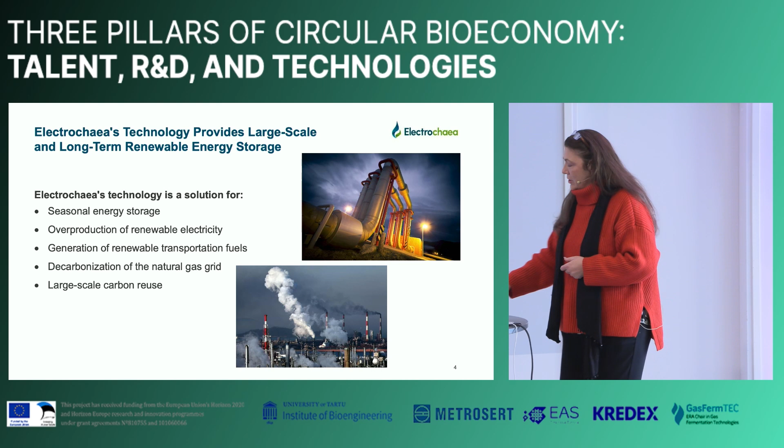It's also fine. Okay. So I will also target the question of renewable energy within my talk. And before I start, I would like to give a general overview. I will talk about energy and energy storage, especially from renewable energy. I will talk about the overproduction of renewable energy, the generation of renewable transportation fuels, decarbonization of gas grids, and also the large-scale carbon reuse, which is the link to the current session of carbon usage in biotechnology.

So let's have a look. Let's start with the whole value chain. On the left side, we are using electricity, renewable electricity preferably, for generating hydrogen. And we are also using carbon dioxide as the only carbon source. So I'm not talking about organic carbon sources, but the inorganic carbon source, carbon dioxide. And with the proprietary technology of Electrochaea, with the biocatalyst, we are creating methane in our reactor. This renewable methane is produced from renewable sources, from CO2 and hydrogen. This power-to-gas technology is the core here.

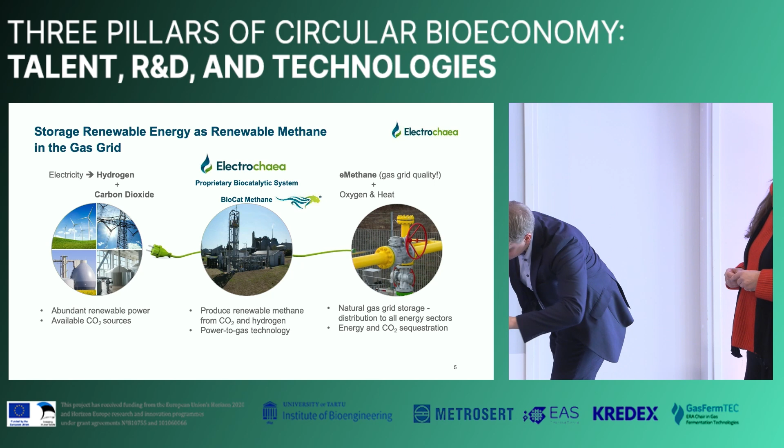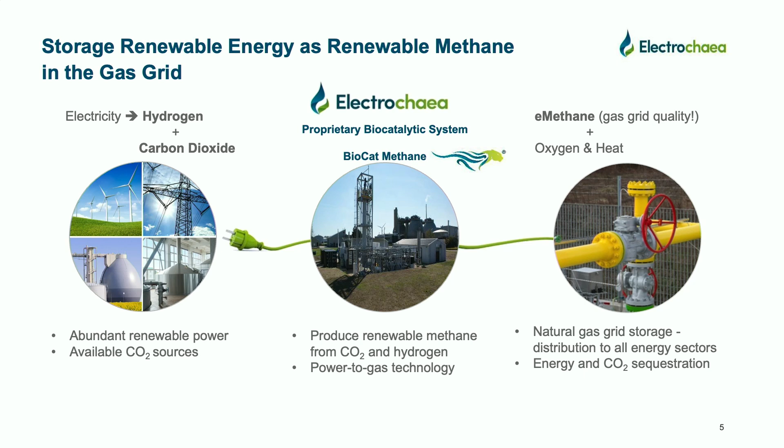And this methane has, there were some strange vibes here, we're producing gas grid quality methane, and we are also producing oxygen and heat. That means that overproduced energy and also CO2 can be harvested into a valuable molecule. I try now. This one. Oops. Okay. Good.

So with renewable electricity, we have to keep in mind that we have a very fluctuating energy market. That means we have times with overproduction, and that electricity has to be stored. When it comes to storage of electricity, the first thing that comes to mind is batteries. But not every technology fits well. We have to consider the amount, the capacity we want to store, and also the time frame. Batteries are very good energy storage systems at a comparably small scale. But for large amounts of energy stored over a long time period, we reach hydrogen and methane.

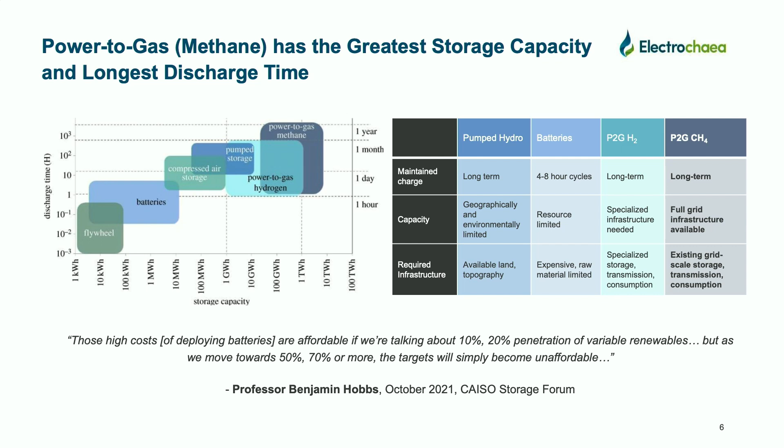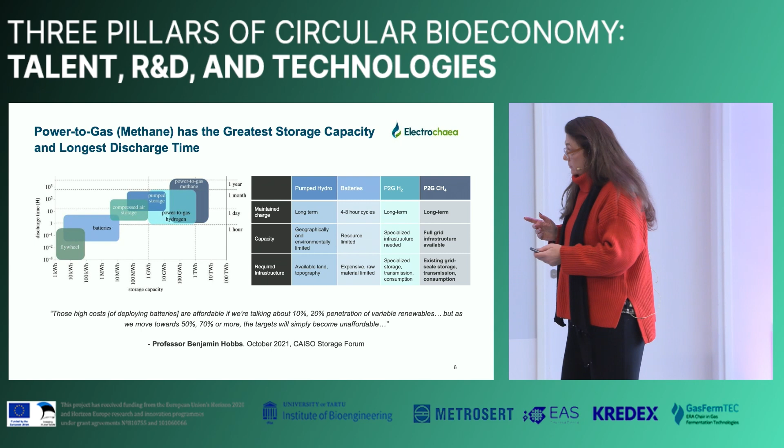When we distinguish between the pros and cons of hydrogen and methane, both are suitable for long-term storage. But one advantage of methane is that with the gas grid already established, the infrastructure is already available. In contrast, hydrogen is a very small molecule, as we know. So the prerequisites for storage and implementing the infrastructure, which is not widely available currently, are very cost-intensive. So when we want to store and transport energy via methane, we can use the existing gas grid. Wow, okay.

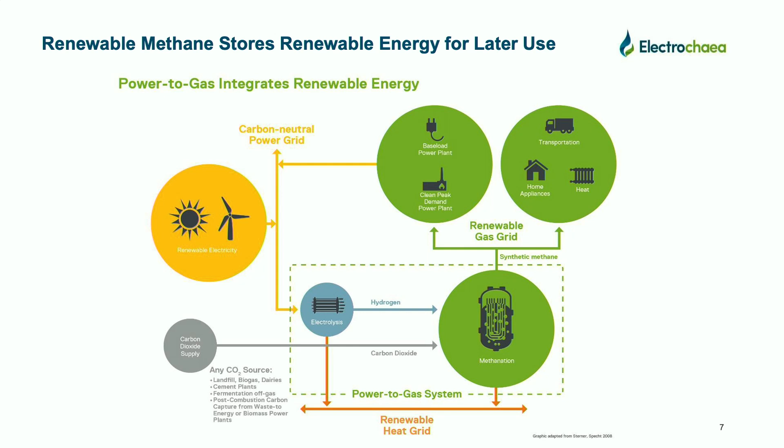And now, a quick look at this circularity. On the left side, the yellow dot, again, the electricity, and then the carbon source. Essentially, it doesn't matter from which process the carbon dioxide comes. With carbon dioxide from biogas plants, we can use it directly because impurities in the biogas, mostly sulfur and ammonia, are also nutrients for our biocatalyst. Other carbon sources from industrial processes might need to be purified, although the biocatalyst is quite robust and can handle a lot of impurities. Both are fed into the methanation process, and the hydrogen production creates heat, and the methanation reaction itself creates heat. It's an exothermic reaction, and this heat can be used either on-site or in the heat grid.

And the produced methane can also be injected into the existing gas grid, used for heat, used for transportation, can be used for households. And on the other side, it could also, as green methane, be used in power plants if we need electricity. So that is the circle. And as well, the heat and also the methane could also be used on-site.

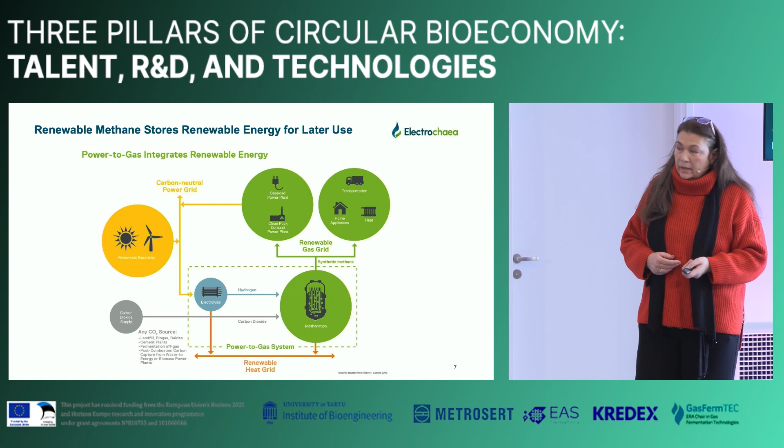I would like to give you an example. When we're looking at a wastewater treatment plant, for example, and they have a biogas fermentation facility on-site, they could also use the methane on-site, for example, for electricity and heat in CHPs with this upgraded methane. And also the oxygen from the electrolyzer could be used in a wastewater treatment plant for enhanced aeration in the biological treatment.

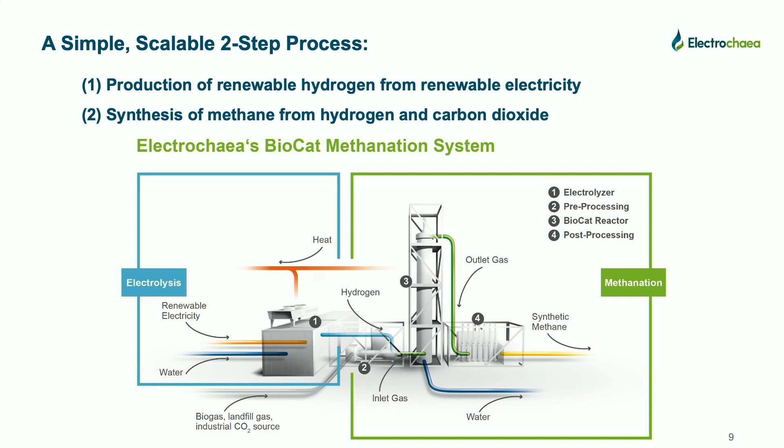So our proprietary technology starts here in the inlet, when hydrogen and CO2 are mixed in a ratio of 4:1. Within the fermenter, the bioconversion to methane takes place via gas fermentation. The fermentation process runs at about 62 to 65 degrees. It's an exothermic reaction, as I told you already, so we have to remove and extract the heat from the process. And typically we work with pressurized reactors, so the whole process is conducted under 10 bar pressure.

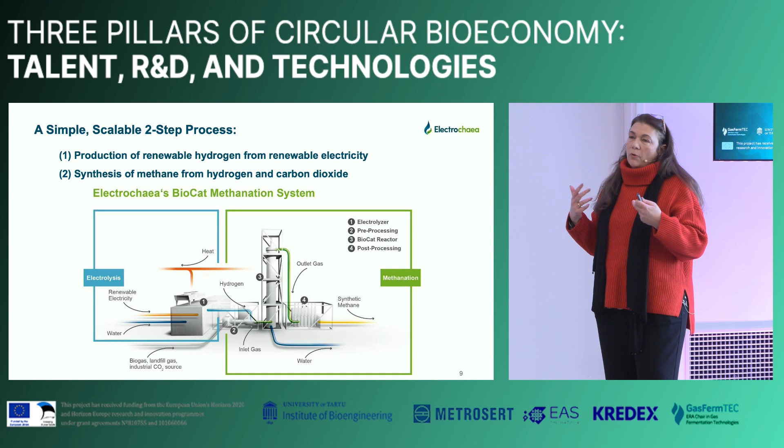On the top side of the reactor there's the outlet gas, which has to be purified if we want to inject it into the gas grid. Purification has to be done mostly for sulfur and also for ammonia.

So the advantage of using a biocatalyst, a single-cell microorganism, is that it is continuously replaced within the reactor. With a classical chemical catalyst, the efficiency decreases over time. A biocatalyst, which is growing and subdividing, is always fresh, let's say, in the fermentation broth. But on the other hand, we have to feed them with some nutrients, with some salts.

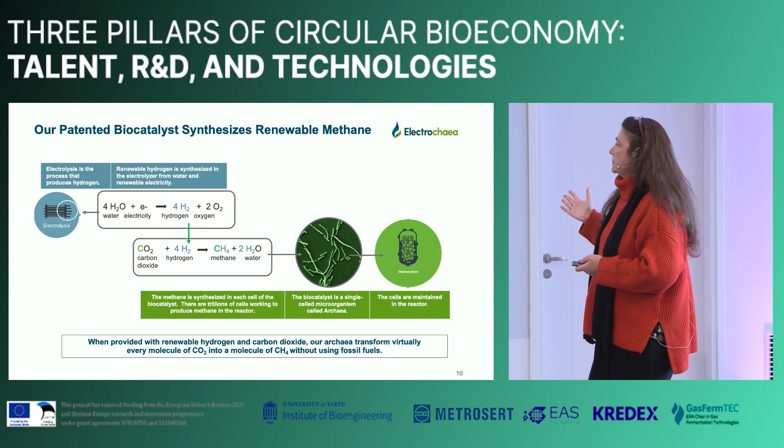Okay, and we are not using bacteria. Our biocatalyst belongs to the domain of the so-called archaea. For the microbiologists within the audience and the nerds, archaea are a separate domain besides bacteria. They are more closely related to eukaryotes than to bacteria, and they appeared on the planet a long time ago. They have been one of the first microorganisms on planet Earth.

They occur in hot springs, for example sulfur-rich hot springs, and also volcanoes and geysers, and they are extremely resilient. So that is one of the advantages, that this biocatalyst is extremely robust. Ours is also growing quite fast, so we typically work at an optical density of around 30, which is really a very thick broth.

And with this technology and with the greening of the gas grid, we are currently in the rollout of the commercial application. Again, a short overview: with this, we can store renewable energy in the gas grids for periods of low supply.

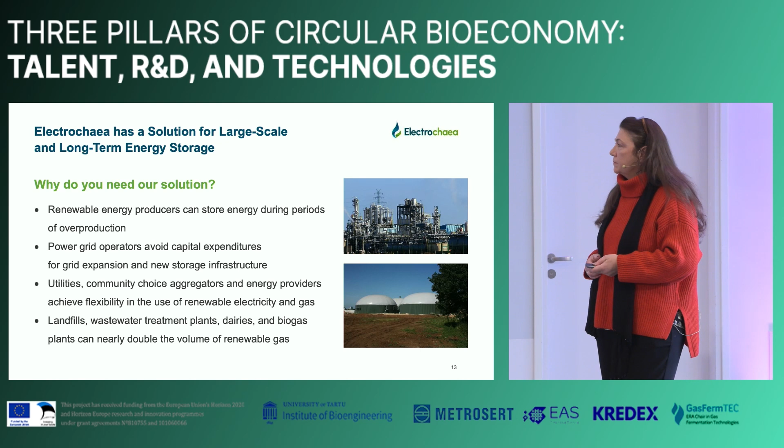Yeah, substitute, I think we've already done. Currently, since we are commercializing the process, the first plant will be built in Denmark, in Roslev. It will be a roughly 10 megawatt plant. That means that the electrolyzer has a 10 megawatt capacity, and we had to calculate the greenhouse gas, so the carbon intensity for that.

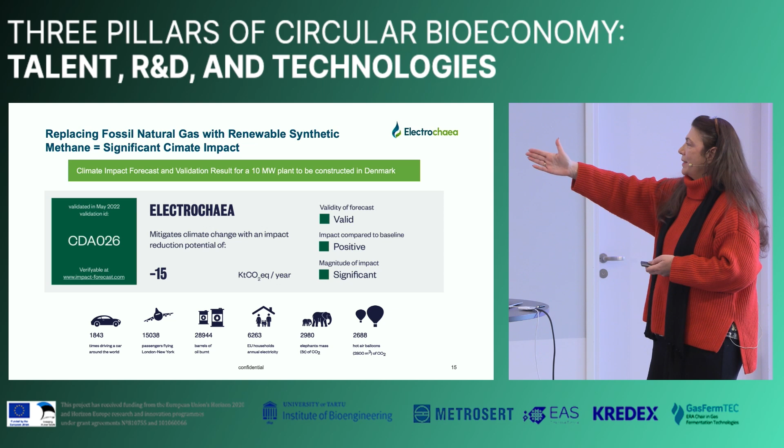And just to get a rough idea what such a 10 megawatt plant, which is a very small plant, because it will be the first commercial plant in the market, we can avoid about 15 kilotons CO2 per year. And that is comparable. I like the elephants most. So the weight of the CO2 is approximately 3,000 elephants.

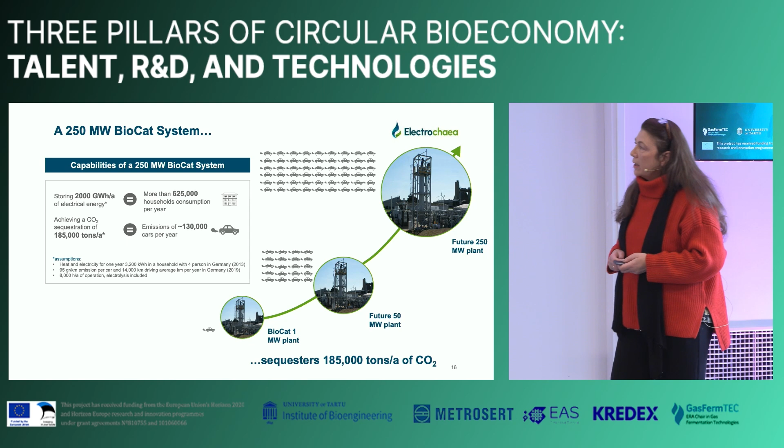And when we scale up further, so the first Biocat plants have been in a 1 megawatt scale, that were pilot plants. Our current first commercial plant is a 10 megawatt plant. And the 50 megawatt, we have already scaled it up and designed the plant, and we are currently developing some projects in Europe as well as in USA for this size. But when we have a look into the future, up to 250 megawatt, we can see that it is a really good tool for an avoidance of greenhouse gases.

With our main investor, Baker Hughes, a global player in the oil and gas industry, we are jointly developing the technology further, and also we are implementing it, and with this investment of Baker Hughes, we are able, as a technology provider, a comparably small company, with this big partner, to roll out the technology worldwide.

When I started at Electrochaea 4 years ago, we were about 28 people. Now we are roughly 60, so we are growing quite fast. Nevertheless, with 60 people, you're not able to do a commercial rollout. For that, you need your partner, which helps you.